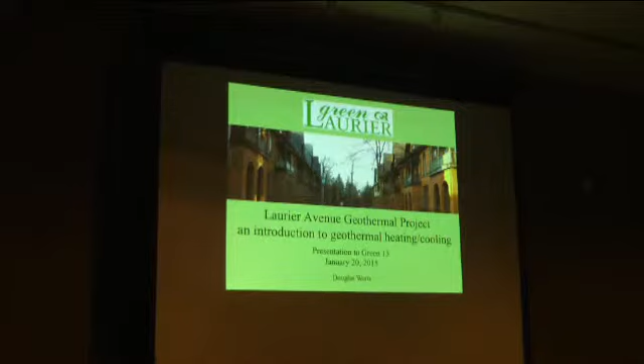So this is, I was asked to come in to talk about a couple of things, and one of them was to tell a bit of the story of Green Laurier, and I will do that. That's a little project that we have going between 2007 and 2011, I guess, before it ran its complete course.

It was an adventure into the world of geothermal heating and cooling, and so lots of twists and turns in that story. The other thing that I was asked to do was to just provide a bit of an introduction, like what is geothermal, and so those are the two main things that I wanted to do tonight.

So the overview, what is geothermal and why should we care? We'll address that question first, and then tell you a bit about the Green Laurier story. And then there's this question about geothermal as a standalone energy system for an individual building or a district one.

And so that is another thing I was asked specifically to address. And what are the challenges? What are the opportunities? And it remains an exciting prospect for the city. There are some interesting things going on. And to have some discussion, find out what you're interested in, and see if I can answer questions. And I'd like to hear more of what's up with you.

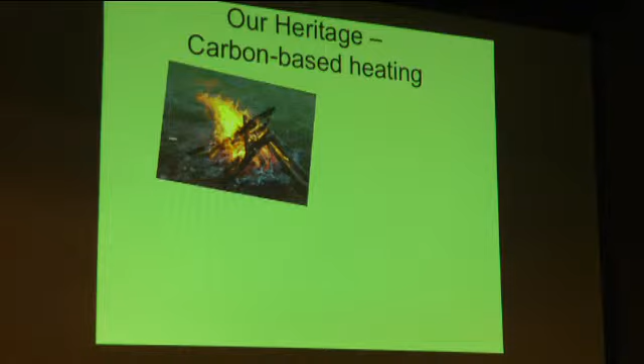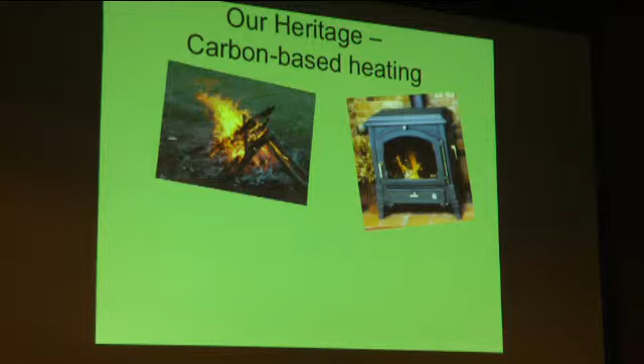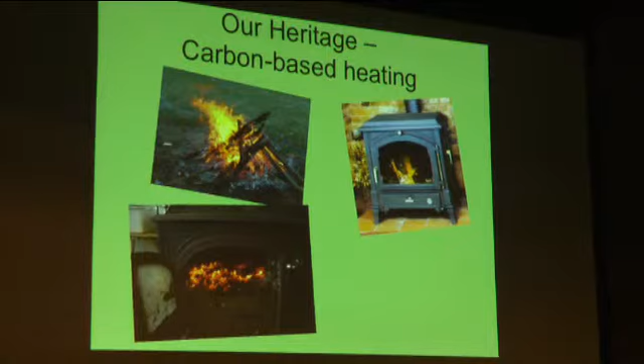So just a little bit about heating and cooling, and there's been a long history in humanity of using burning things essentially to create energy, and it goes back to just harnessing the power of fire, and then when humanity figured out a way to bring it indoors, that of course was kind of transformative, and then along the way, after all the wood was kind of stripped out of nearby forests, then where do you get the fuel? And well, coal came along, and that seemed like a pretty good way of continuing the progress of burning things in order to get energy.

And eventually we end up with sort of this contraption, which is essentially a gas furnace. And sort of no fuss, no muss, you hardly even know that it's going on, except that it just continues to work in the background and provide us with heating and cooling.

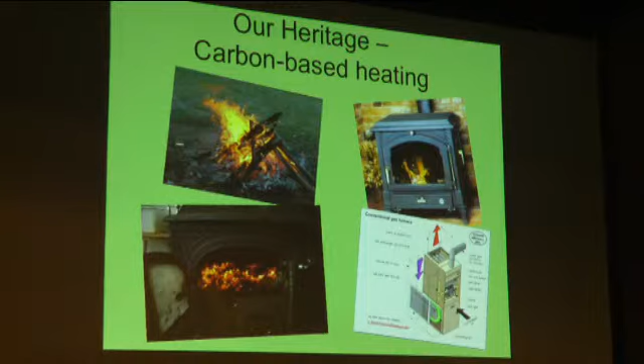And each one of these has its moment in history where, as an innovation, it was incredibly significant, and it was appropriate to its time. All of them had an appropriateness. But as time goes on, as the number of people using these systems grows, you eventually get to a point where these things no longer are working within our time, and we need to find new ways to address our issues and problems. And so one of the innovative things that has happened is this world of geothermal.

And so just thinking about the word geo, the ground, and thermal, it comes basically from this idea that there is heat in the earth. The core of the planet is super hot, and there are all kinds of ways in which that heat comes to the surface through volcanic kind of systems, and Iceland is a great example of how they've been able to take that hot water and turn it into steam that drives turbines. They can create electricity out of it. They can also heat water. They can pipe it. They can do all kinds of things.

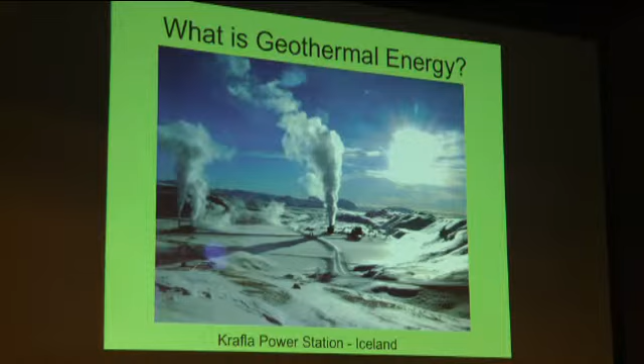In a place like Toronto, we don't have those kinds of resources accessible to us, so we need a different kind of solution. What we're talking about isn't really geothermal, it's a geoexchange technology. The basic concept is that the ground remains at a constant temperature, once you get below about 5 feet it stays around plus 8 to 10 degrees. There's heat down there, and you can pull that heat out and move it from here to here, which ends up being interesting.

In the summertime, it's hot outside and you want the inside to be cool. Like a refrigerator, which works not by creating cool but by extracting heat, this system takes the heat out of the house through heat exchange technology and sends it into a pipe that goes down, depositing the heat into the ground. As the heat goes into the ground, the water gets cooler, goes back up, and back into the house, so you're able to distribute cool air.

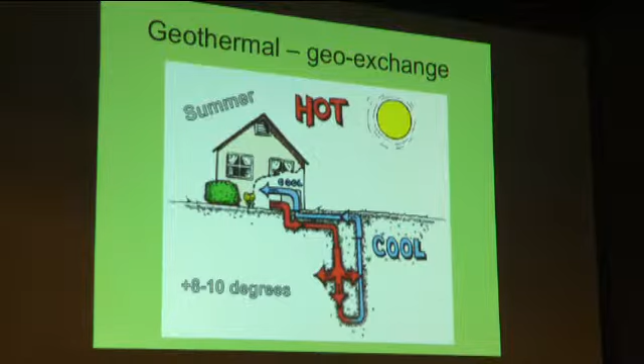As long as the Earth continues to contain heat and remain at a constant temperature that you can move heat into and out of, it ends up being incredibly efficient. Unlike burning things, where you have to transform something and energy is a byproduct of that, this kind of system moves heat around. You don't have to generate new heat, you really just move around existing energy. That's why it ends up being 3 to 4 times more efficient than the most efficient fossil fuel.

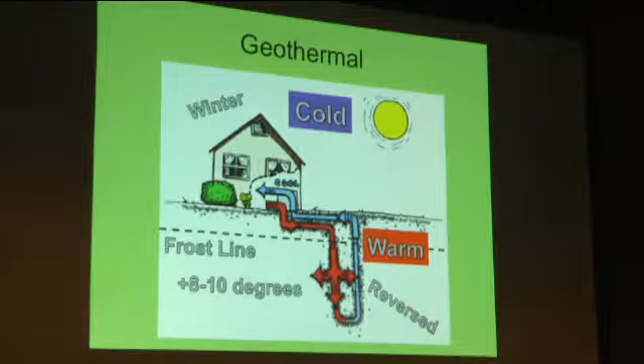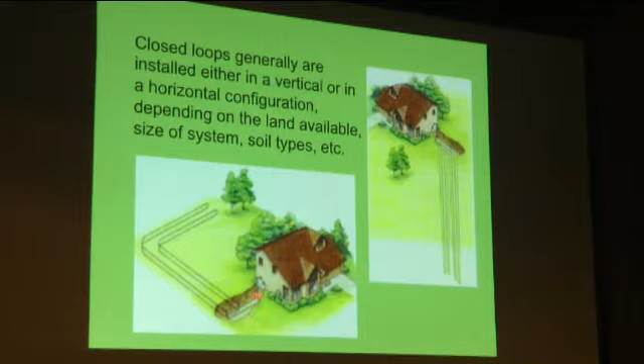So what does it really look like? That was an interesting diagram, but kind of simple. If you have a house with a lot of land around it, you need to put piping into the ground where that liquid goes, either putting heat in or taking heat out, and it requires quite a long loop.

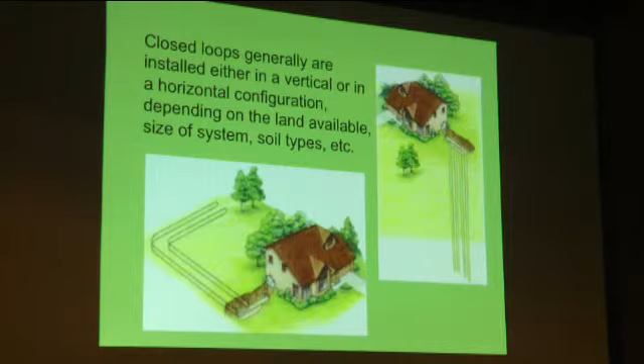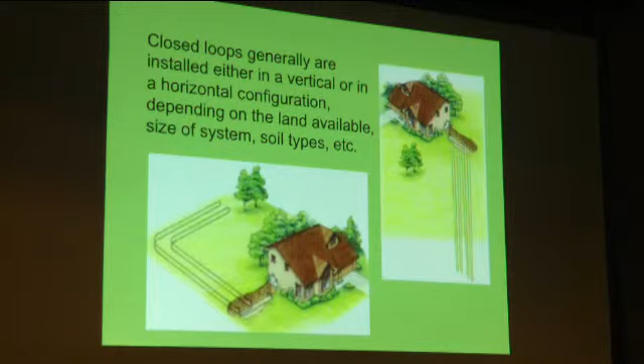If you don't have much room, then you go down. Anything that's urban is essentially going to be in this category, because there's very few times when you've got this kind of space. But farms have been using geothermal for decades, and since they've got lots of space, they can dig 6 or 7 foot trenches, put in their piping, and they don't have to bring in a drilling rig.

This is a little bit more realistic look about things, except this isn't the actual size of it, you have to imagine these things going really deep. How deep? Here we've got the same piping configuration, and here we've got a heat exchange unit.

Part of the magic in a geoexchange system is the heat exchanger, and honestly, I still don't understand exactly what it is. It's kind of like understanding how you take heat out of a refrigerator, I don't really get that. But it uses pressure to take a heat differential, let's say it's 0 degrees outside and you're trying to pull heat out of the ground at 8 degrees. A heat exchange unit, using pressure and whatever other magic it does, is able to amplify the heat, concentrating it so you can blow it through your house and actually get 75 degrees coming out of the heating ducts.

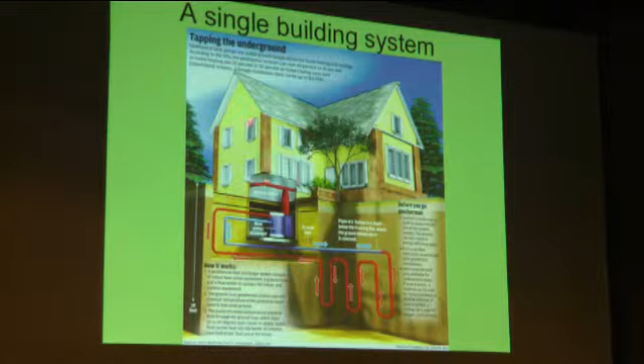So I just wanted to point out this component, the heat exchange unit, which feeds right into a duct system that goes throughout the house, just like any forced air system you might have. You can also use a geothermal system with a water-based distribution system through the house, kind of like a radiator.

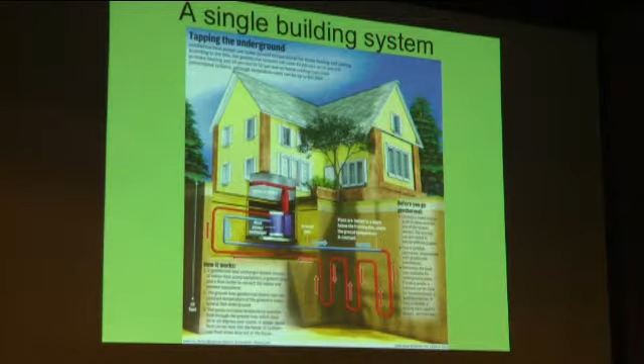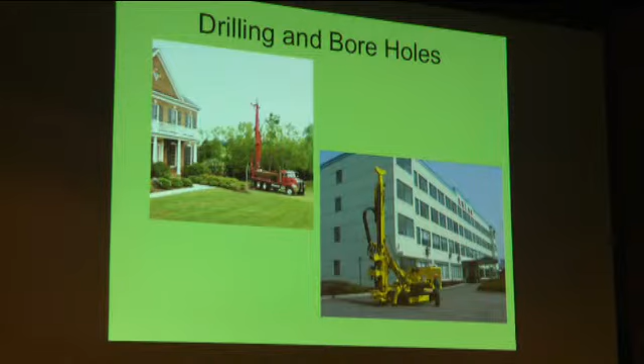So there are different ways you can configure these things, but just wanted to give you a sense of that. If you wondered what a drilling rig looks like, here is one attached to the back of a truck. They've got about a 30-foot height, and moving these trucks around means you have to really think about what is above ground wherever you want to do drilling. In the Laurier project, we had to deal with that because of overhead wires. Then there are some purpose-built devices that have their own little system for maneuvering, and aren't attached to a typical truck.

So if any of you are looking at energy efficiency, you've encountered this: if you want to build something new from scratch, you can do that very efficiently and achieve high levels of energy efficiency. But if you want to retrofit an existing building, it's a whole other ballgame. Lots of obstacles to deal with there. And of course, the city's housing stock and building stock basically already exists.

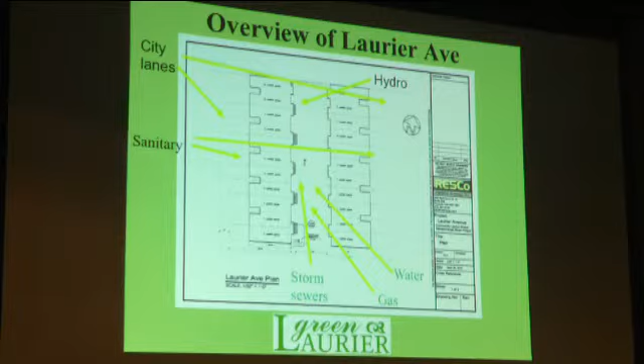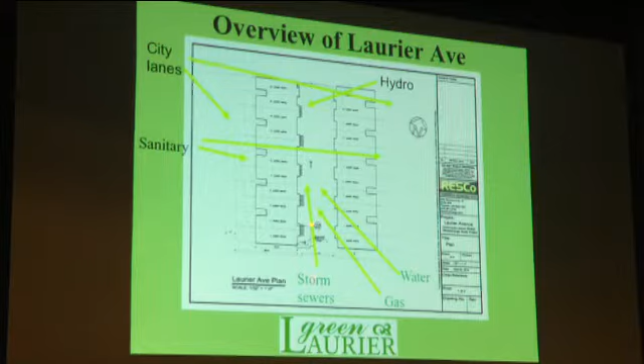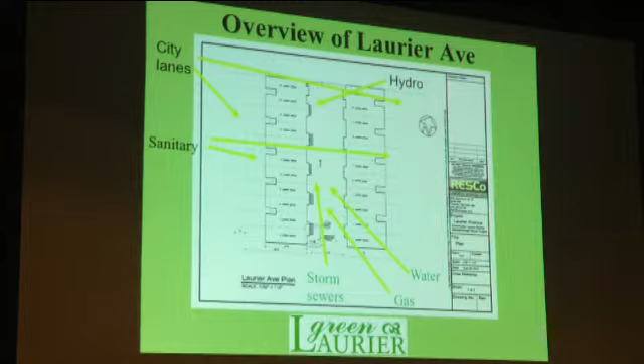We hired a company called RESCo to do this. Some of the obstacles we were dealing with: there's a storm sewer system that runs down the street itself, sanitary systems running along the backs of the houses, and water and gas lines under the road. We had to figure out all this stuff. This is a good prototype because this is how the city is built. Above ground, we had to deal with wires and virtually no yards, plus trees, so lots of obstacles.

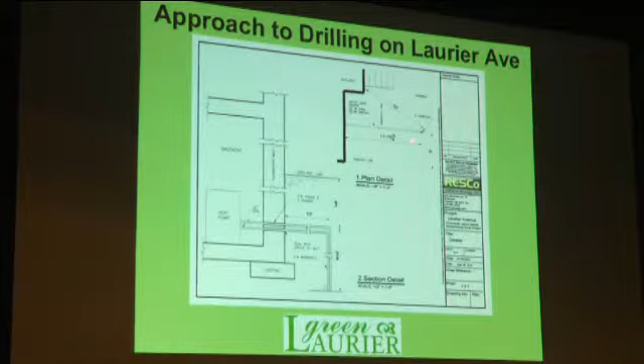I just wanted to remind you of what the street looks like as I go into this. This is a section detail of the front of a house, that's a footing, and this is the front wall. Here you can see the basic concept of a geothermal system, piping going out and then down 400 feet. One borehole 400 feet down would be what each house would require to heat and cool it using a 3-ton heat exchange unit. You can see in the front there's just not a lot of space, especially with the right-of-ways.

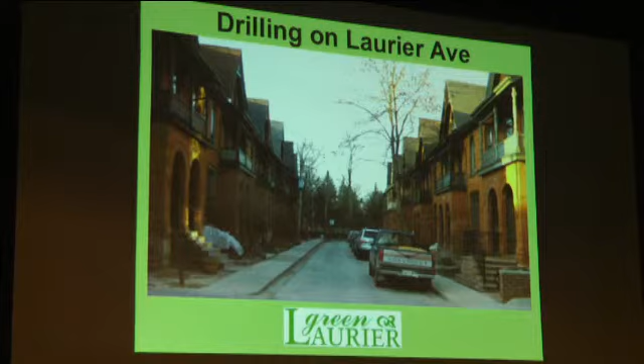Again, just to remind you of where we're talking about bringing in these drilling rigs, this is a drawing that I made. Again, this is a footing of a house, and the property line comes out to here. This is the ground along here, so this would be considered private property. This is the city right-of-way, this is the sidewalk, and then we drop down, and this is the street.

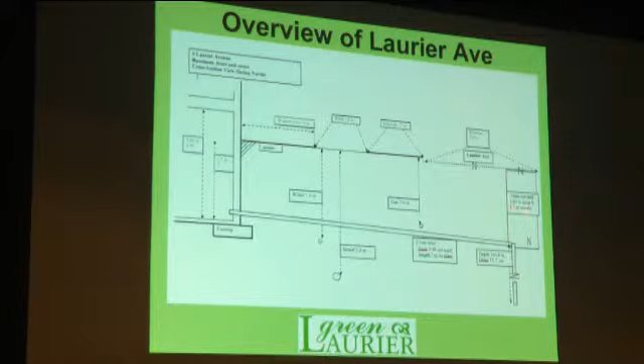What we worked through with the engineers was digging a hole 1.5 meters square and 1.65 meters deep, down like this, then getting horizontal. We'd drill vertically down 400 feet, but then get a different drilling company to come in and do horizontal drilling that would go over and into the foundation of the house, going through the various utilities - there's a water line here, a sewer down here, and a gas line there. But the locating technologies for all of this are really precise, and the technicians can guide this kind of thing.

It was an amazing thing - one day we had the City of Toronto Environment Office, the Transportation Department, the Heritage Department, the Forestry Department, our neighbors, and the DVCRA all on the street, starting to look at where we were going to put these holes in the ground, in the road. We had a fairly long-standing relationship with different parts of the city and had worked through a lot of issues as we were moving forward. The Transportation Department, they're the ones who were always there, but they never gave us anything in writing, and I should have been wise to that, but it ended up being a problem.

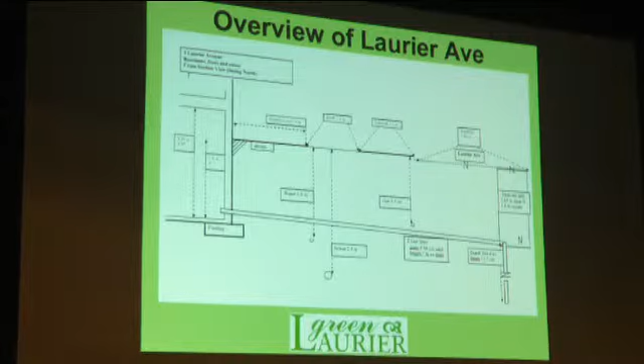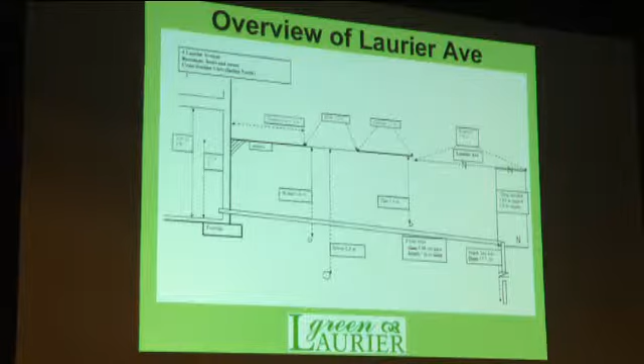Late in the game, they changed the rules. They told us that they would be able to sign off on behalf of Enbridge, so that we didn't have to go and get approval from the gas company, but they also did not say anything about any of these issues. At the 11th hour, they told us that we would not be allowed to come within a meter of any of the city property underneath here. That became a real problem - the water and the sewer were the two big ones. So what's the implication of that?

Well, I can show you the implication. This is again a section, same house, but now in order to miss the storm sewer and the water by a meter, I can't remember the exact figure, but we couldn't go above the water - that would take us too close to the surface. We had to go a meter below the sewer, which meant we'd have to drop this hole down to more than 12 feet. In order to get down 12 feet and then do horizontal drilling, you have to make the hole gigantic to fit the angles and the equipment needed to make these things work. So I did these drawings at the last minute, and it was one of the last straws for me.

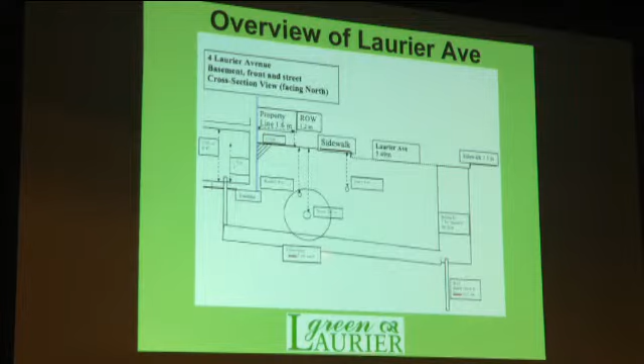Before we abandoned it... it was a pretty interesting exercise to go through. I'll just continue here, and we'll come back to what happened with Green Laurier. But let's look at the opportunities for geothermal systems.

What we learned through the study was that bar none, there is nothing more efficient than geothermal for heating and cooling. One unit of energy input will give you 3 to 4 thermal units of output. To compare, if you've got the most efficient gas burning system, you'll get very close to, but not quite, 100% efficiency, like one unit in gives you one unit out.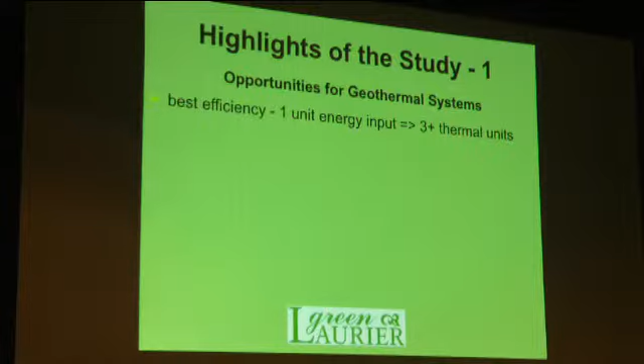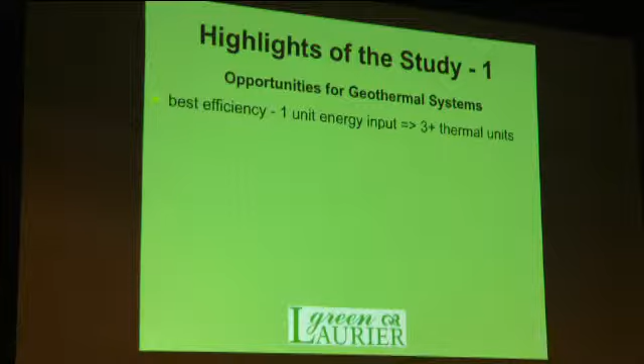Oil is considerably less efficient than that. But here you get this high efficiency, and the telling thing is that you've got no greenhouse gases coming out of any of this, except what you need to generate the electricity. The systems are quite efficient. So anyway, this is the final, ultimate result of the efficiency analysis.

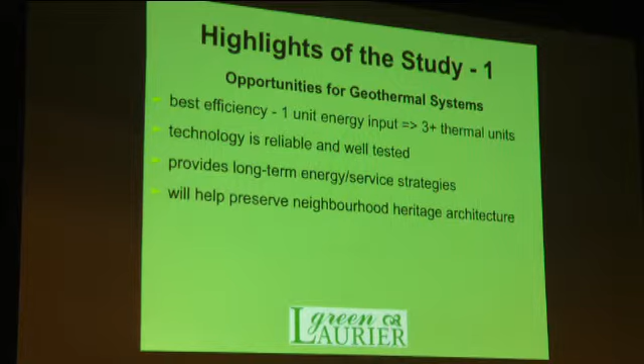The technology is reliable, well tested. It's been around for decades. It provides long-term energy and service strategies. It'll help preserve neighborhood heritage architecture, and it has low greenhouse gas emissions, limited only by the electricity supply.

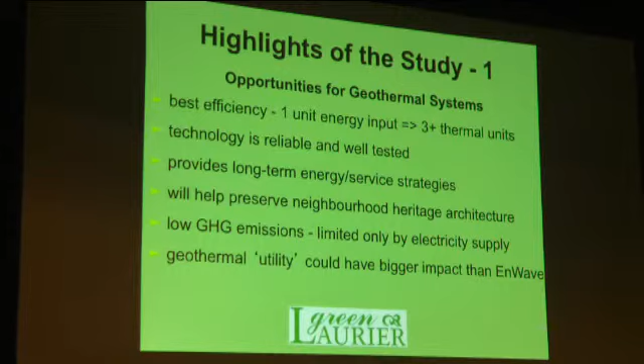If there was a rollout of a geothermal utility retrofitting the entire city, all the buildings with geothermal systems, it would have a much bigger impact than EnWave. Are you familiar with EnWave? No. It's the deep water cooling system, and I think you're going to talk about it, right? A little bit, yeah.

EnWave—the city just sold off its share in it—uses cold water from deep in the lake, pulling it out and sending it through the office towers downtown to cool them without having to use conventional air conditioning systems. It's hugely efficient, but it is a form of this geothermal concept.

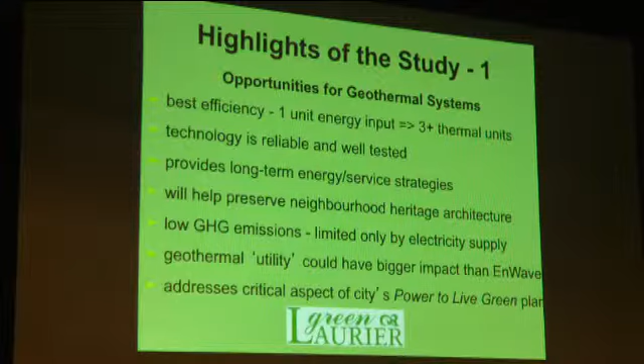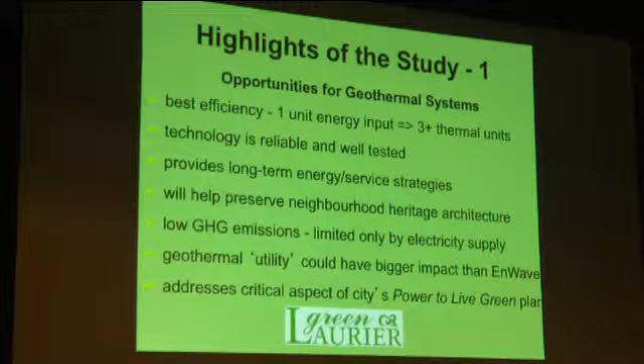This kind of utility would have a massive impact on the city's greenhouse gas emissions. It also addresses a critical aspect of the city's Power to Live Green plan. The city has an environment plan called Live Green Toronto, and an energy plan called the Power to Live Green. It's a very interesting document. I don't know what its status is after the last four years, but it's well worth having a look at.

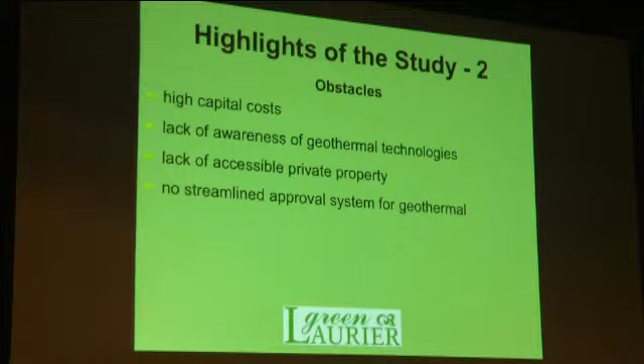There's no streamlined approval system for geothermal. One of the things we realized was that we were being encouraged by Live Green Toronto, the city, to do these kinds of things, and then we ran into amazing obstacles from other departments in the city. So when we got through the feasibility study, we eventually said to the Toronto Environment Office that if you want us to push further, you're going to have to help us actually make this real.

And they did—they gave us a staff member to help us navigate City Hall. It was amazing, we got a lot accomplished. We ended up eventually giving up, but not without a huge amount of success along the way.

One of the things we realized is there's no real system for getting approvals for a geothermal system, and there are high fees for implementation. Because we were going to use the road, they saw us with the same kind of interest as Enbridge, charging fees for anyone accessing land under the road, plus an annual fee beyond that. Crazy stuff. We ended up having those fees waived for us if we managed to actually get it to happen, but they're still there as far as I know.

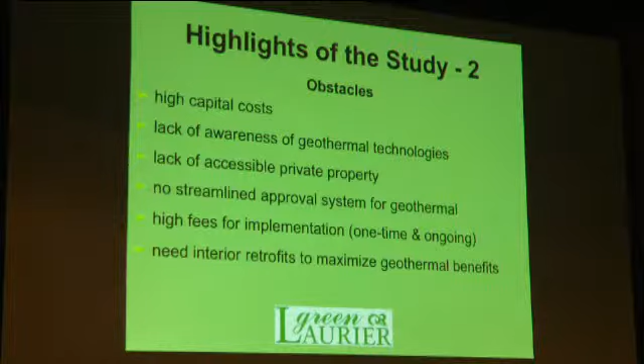You also need interior retrofits to maximize geothermal benefits. That means doing everything you're probably already engaged in, especially with insulation, to make sure the house is a well-sealed, efficient envelope in order to make these systems work well.

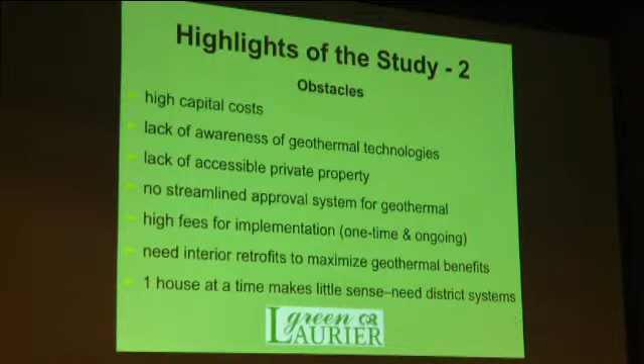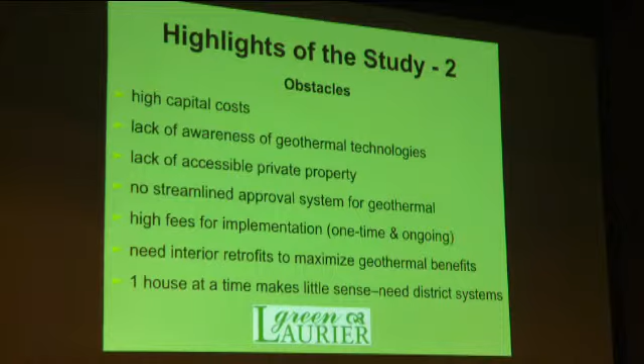We did realize that doing one house at a time doesn't make much sense. In the final analysis there were 6 of us on the street willing to go forward until we ran into obstacles we couldn't deal with. But even if we had 6 out of 22, working one house at a time is not the way to go. The way to go is through a district system. It's more efficient, and it addresses the scale of the problem Toronto has with a huge building stock, all of which is inefficient.

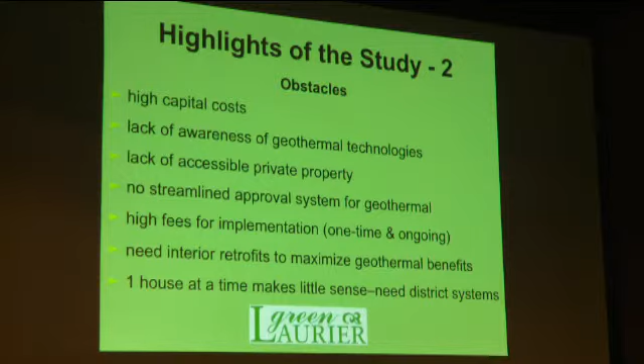So how did it end? Well, we submitted our report. The Toronto Environment Office helped us navigate City Hall. We had huge support from Pam McConnell, David Miller, Glen Murray, our MPP. But we watched costs escalate, and more and more of our neighbors withdrew as the costs got higher. There were many parts of this that we didn't know when we started, all of which have a cost.

City Council, the Community Council, ultimately approved Green Laurier conditionally, and the conditions were that we met the requirements of the Transportation Department. That's really what killed us. The other thing going on was that the end of the Eco-Energy grant program was coming up, and we weren't confident that if we had gone forward we would have gotten all the work done and inspected in order to get the grants. We really couldn't afford this without those grants, the $10,000 a house grant.

The Transportation Department threw up obstacles we couldn't overcome, and I don't know why they weren't way more upfront about that at the beginning, because we were definitely talking to them. So we gave up. But one of the big lessons there was learning about district systems, and it's the way to go.

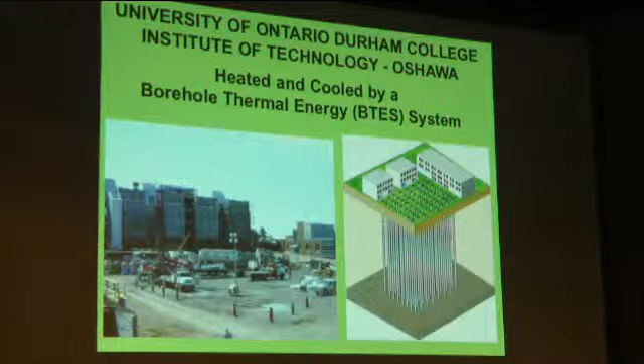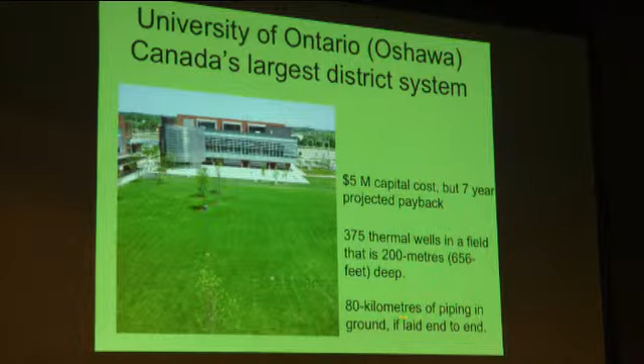This isn't even the actual number of boreholes there—there were far more than that. This is the site in the midst of its development. There was a $5 million capital cost to make it entirely powered by geothermal, both cooling and heating, but it only had a 7-year payback period for the whole system. 375 thermal wells had to be drilled 200 meters deep, an amazing amount of drilling, and down below are 80 kilometers worth of piping if laid end to end. This is what the building configurations look like, and this is the bore field.

I learned about this teaching a course at George Brown called Sustainability of the City and You, about 10 years ago. I had a colleague who's a hydrogeologist, and I didn't know anything about geothermal then. She came in and showed me all this—they had finished the bore field for it all. This is where I got the idea for Green Laurier, from Joanne. It was just such a stunning example of the power of this new technology.

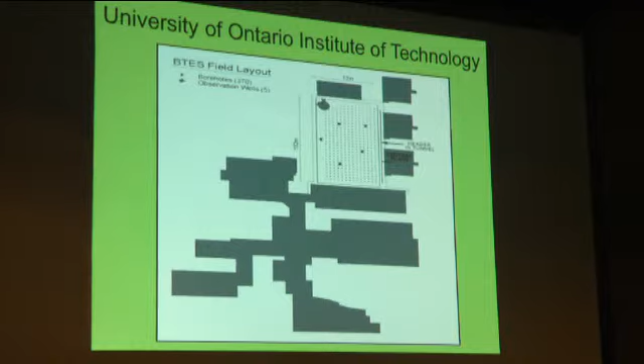But also closer to home, at 92 Carlton Street, Toronto Community Housing has been working with district systems—a district geothermal system—in an old historic building where they kept basically just the facade; there's nothing there but that facade in terms of heritage. This entire community housing building is built on top of a bore field underneath it. That's how confident they are in the technology: they put in the bore field and then build the building on top of it. This is an example of the city actually taking up this kind of technology and applying it within their own frameworks.

One of the impacts of the work we did with Green Laurier is we attracted the interest of some architects who are really into energy. They came to me and said, what would you think if we tried to spin the Green Laurier thing into a larger district project? Their idea was Finch Park.

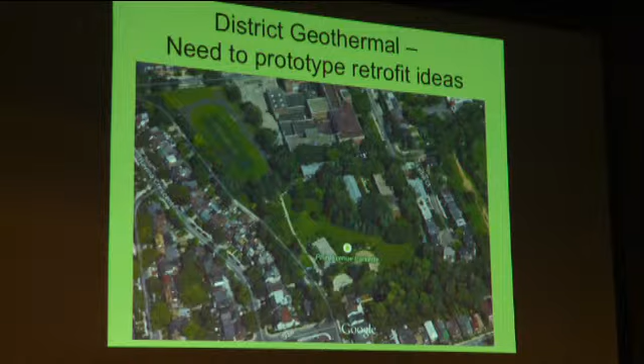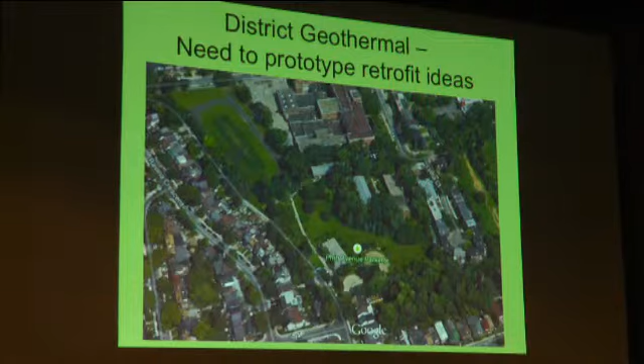And you put the bore field underneath the park. It's going to be a mess while it's being drilled, but ultimately this doesn't require drilling under the roads—this is a lane that runs along here. So it's not actually a road, and I think that probably makes it easier to deal with the transportation department than it was for us. All of these houses are backing onto the park.

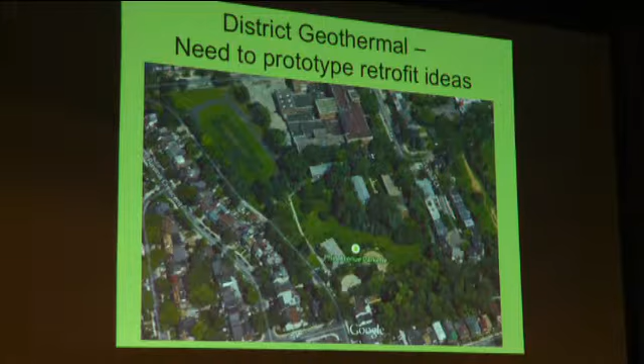So it was really kind of an ideal thing, but it's the kind of project that I think is really required in the city to move the ball down the field, as it were.

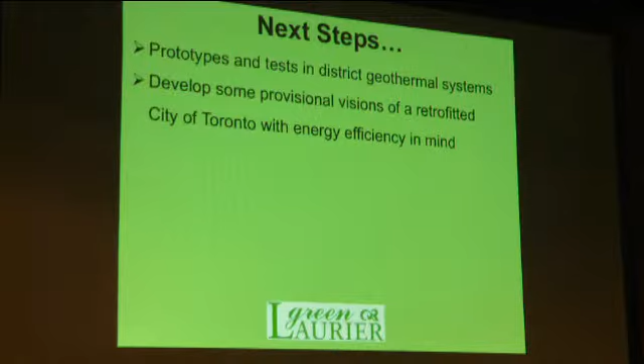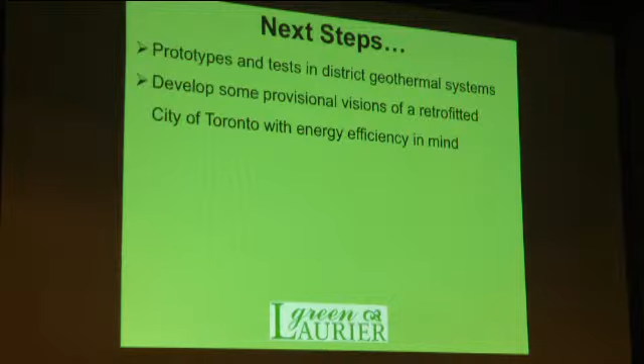Next steps: I think prototypes and tests in district geothermal systems are required, to develop some provisional visions of a retrofitted city of Toronto with energy efficiency in mind. At this point, I don't think there is a real vision of what the city as an energy efficient place is—not that people have a sense of connection to. If anybody's got these visions, they're kind of isolated, and people don't feel connected to them. Project Neutral, I'm sure, has an image of what this looks like, but it's not well integrated into the fabric of the larger community.

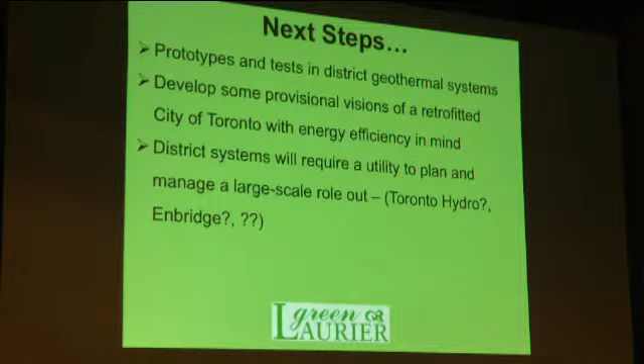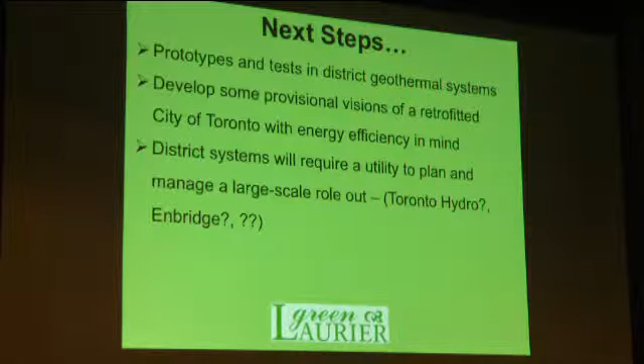District systems will require a utility to plan and manage a large-scale rollout. I've talked to the people at the city about this, and I've even talked to some folks at Toronto Hydro and at Enbridge about it. But that's the kind of thing that's required—somebody, some organization that can actually take on a monstrous task of planning around the retrofitting of the city's buildings using these kinds of models.

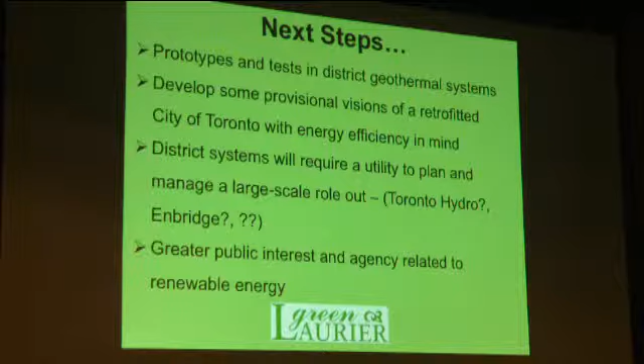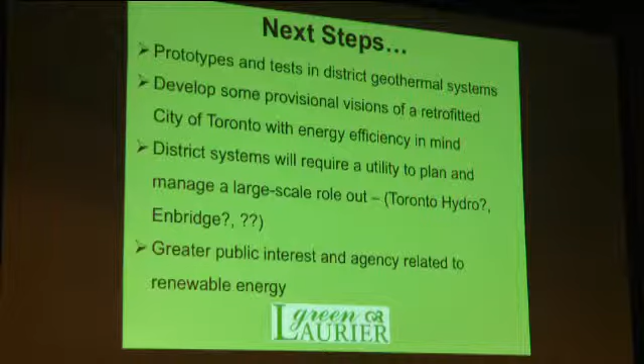And we need greater public interest and a sense of agency related to renewable energy. We are seeing more and more things like Green 13 and Project Neutral and Green Laurier, and those are exciting. But you can only bang your head against some of these walls for so long before you get pretty tired. So anyway, that's my little story.